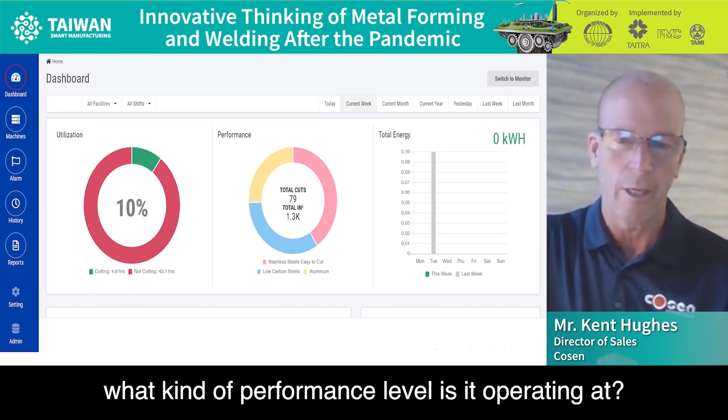First of all, Mechalogix was designed for utilization of the machine. Our concept is that we'd like to know and understand, as that bandsaw machine is operating in the facility, what kind of performance level is it operating at. That way we can learn and understand the efficiencies. Is it operating at 70%? How do we improve upon that? Or is it at 40%, and there's a lot of issues maybe as far as applications, or possibly it's operating at 90%, and we may need to look at new machinery investments.

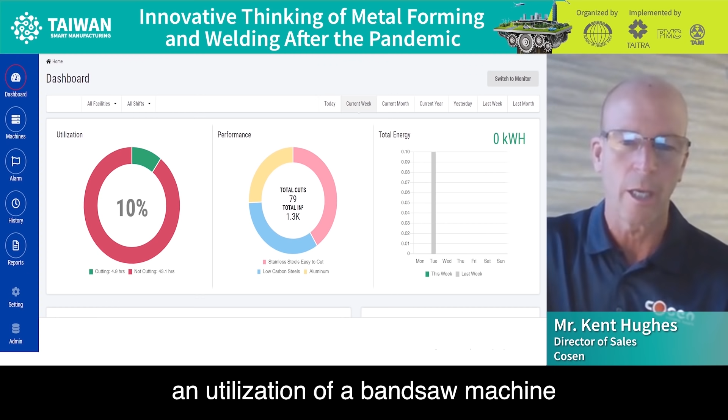That was the original concept of Cosen. Once we introduced it to the marketplace, it became much different. We've improved upon it, we've added many features to it, and mainly those features come back down to understanding directly what was going on with the bandsaw machine itself. Here you can see where we can show utilization of a bandsaw machine and actually how many pieces and how many square inches it has cut during this time frame.

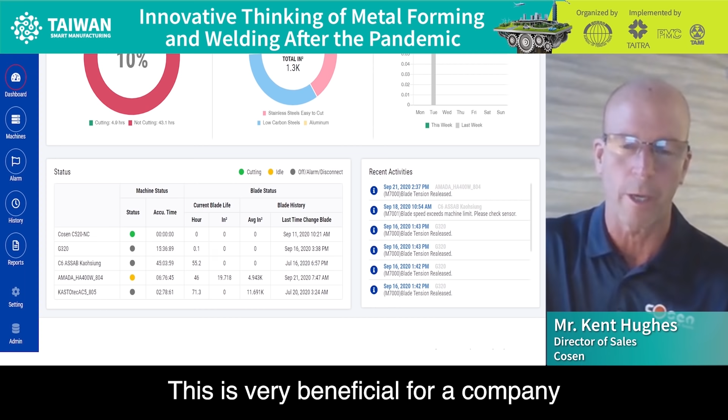You'll see on this next slide, if I am a customer that has multiple machines, maybe in one facility or multiple facilities throughout the country, I can now drill down and I can see all the bandsaw machines within my organization. I can see what the status is of each of these machines. So this is very beneficial for a company that has a larger operation, many more saws in their facilities.

Once I get to this next dashboard, this is a very important dashboard. Now I can look within each facility or each site category, and I can look at each specific machine, and I can see what is currently going on with that machine, whether it is up and running, what type of bandsaw blade is on there, what speeds that machine is running, what feed pressures, what is the cutting rate. So I have a lot of detailed information.

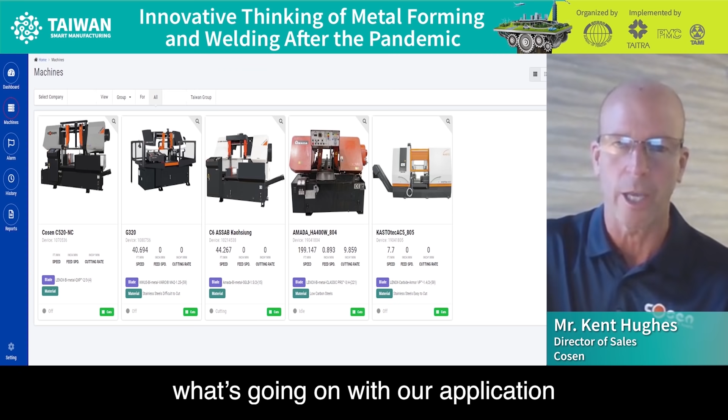And this is just a dashboard, but what I can do is click on each of these machines and drill down into more information, which will help me understand what is going on with our applications and how we are performing for each application and each saw.

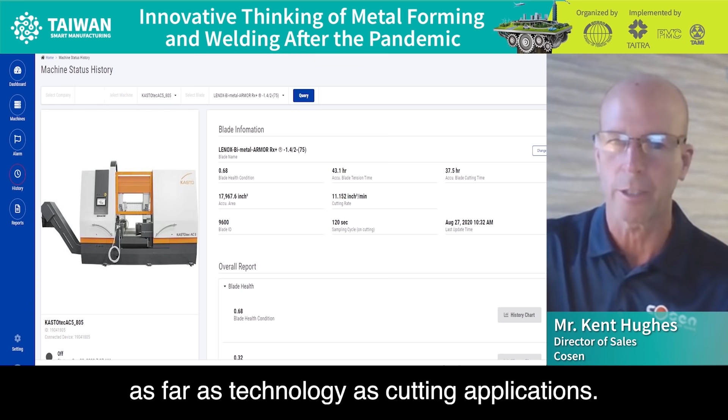From here, we can look at the blade information. Any bandsaw machine is great as far as its technology and its cutting capability applications, but the bandsaw blade is really truly the tool that's doing the work. A lot of people have a hard time understanding what kind of performance level they are getting off of each bandsaw blade. This really helps drive the information of each blade, what it's doing, what its total life has been, and what kind of cutting rates it's getting.

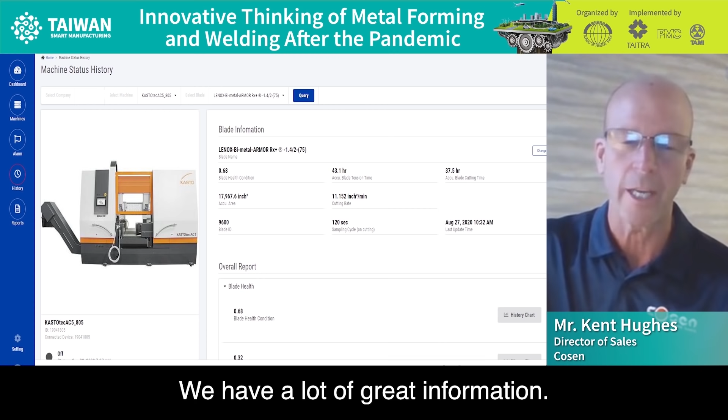So it really helps us to understand which bandsaw blade may be great for that machine or for that application that we're currently running. So we have a lot of great information. That is what has improved upon Mechalogix over the last couple of years, is more of the blade information.

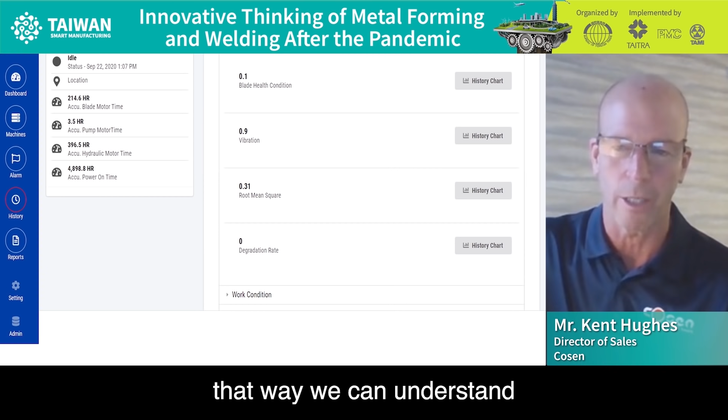On our next slide, you can see that we have windows here where we can drill down. We can look at specific blades, we can look at charts, we can put up alarms on blades to really understand. So it's not just the performance of one blade, but we can start to look and see a history. That way we can understand what each blade is doing, but also what all of our blades are doing throughout the course of the year so that we can understand our total selling costs.

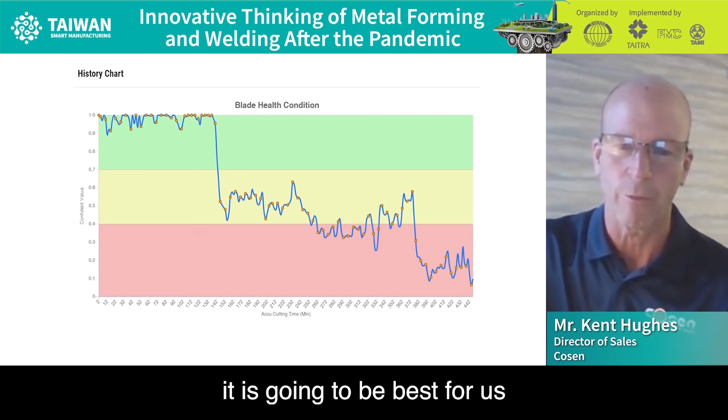And at that point in time, if we have an exotic material that's going to take a long time to cut, it is going to be best for us to make that decision to change that blade. So the data that we can pull on the performance of the blade is very, very beneficial for us for our future job cutting. And once again, so we're measuring the life of the machine, the performance of the machine, we're measuring the performance of the blade and the life of the blade.

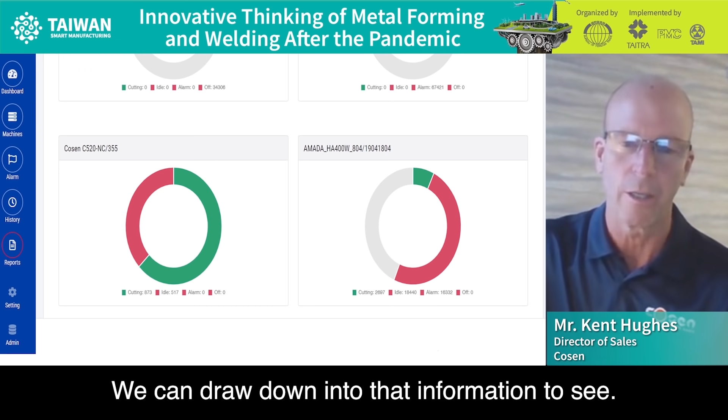Next aspect we get into is the total utilization of each machine. How much time is a machine cutting over a month, or over a quarter, or over a year? We can draw down into that information to see. And then also, what types of materials are we cutting? How many alarms are going off on those machines? What's the default on those alarms? So we can address those. And it helps us become more efficient, keeping our machines up and running, and also keeping peak performance of the blade.

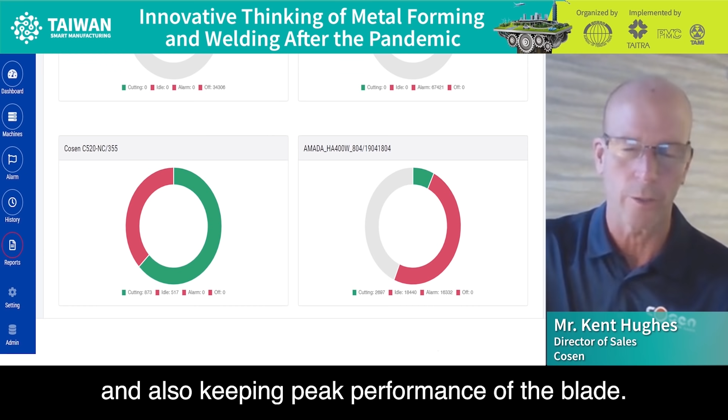Our next dashboard, we can go back into our library. So if we have jobs coming up that we have not cut in a period of time, we can go back and look at our library and we can see which blades worked on those jobs in the previous history. We can also see the performance of those blades. We can evaluate then which blades are going to be great blades for the future applications that we are going to be running. So there's a lot of great data in here.

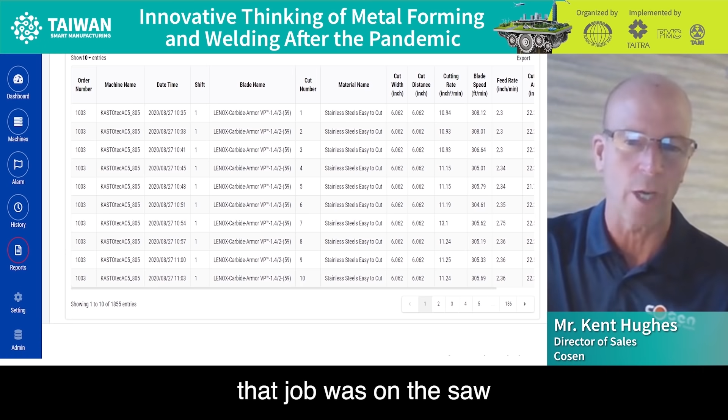And our final thing that we're starting to utilize is that we now have adjusted to where we can do costing on actual cutting jobs. So if you have multiple pieces that are going to be cut for a job, now we are starting to capture the reporting on that, so that we can see how much time actually that job was on the saw, how many cuts it made, how many blades it went through, how much time for the operator. And it really gives us a true performance of what our cutting applications are. So we're really excited about the new features that we're adding to Mechalogix from the original concept of being machine utilization.

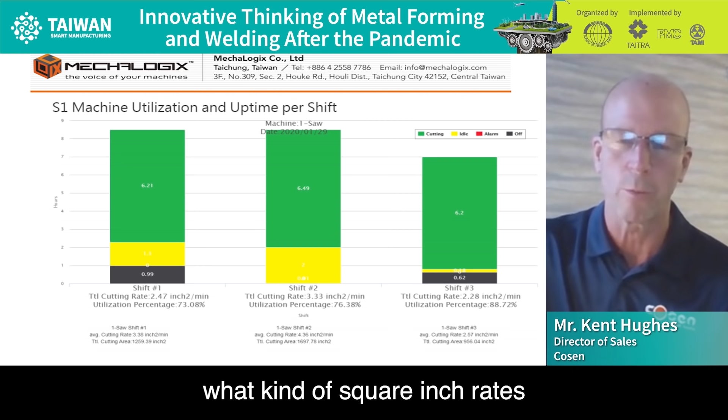Then what we can do from there is we can draw and manufacture reports. And we're really unlimited as far as our reports. You can see in this report that we're able to analyze the utilization and uptime per shift. So we can look at the different shifts to see what they were doing, how the performance was of that machine and the applications. We can look and see what was the uptime, what kind of square inch rate they were cutting on each machine. And it really helps us to understand where our bottlenecks may be, where our throughput is.

But this is great reporting that allows us to address issues on a real-time basis. So we can generate these reports, like I said, on a shift basis, on a daily basis, a weekly, a monthly, quarterly, whatever it may be. But it's a great technology for us.

We're really excited about Mechalogix as we start to introduce it to the marketplace and the opportunities it's going to provide for the end user to understand the bandsawing application and the costing that goes with that bandsawing. That is the one area that many end users don't have information on.

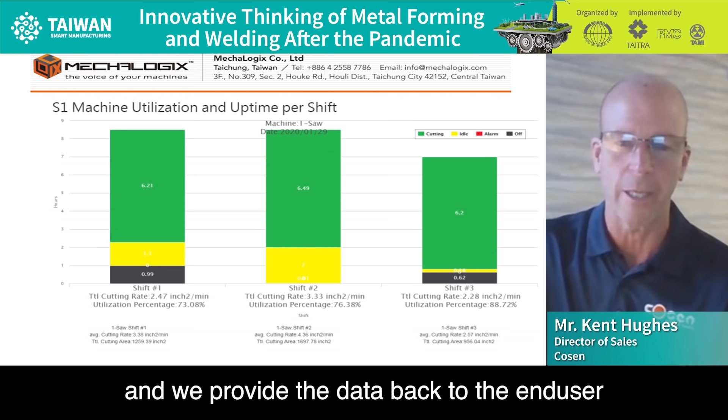Currently they have to utilize spreadsheets and hope the operator will fill in the information so they can capture this data. Mechalogix is a system we hook up to the bandsaw machine through many sensors, and these sensors continually monitor the performance of the machine. Because of those sensors, we don't rely on the human element to input this information. We capture it right there at the machine, in real time. That takes all the guesswork out of it, and we provide the data back to the end user so they can make decisions in their sawing applications.

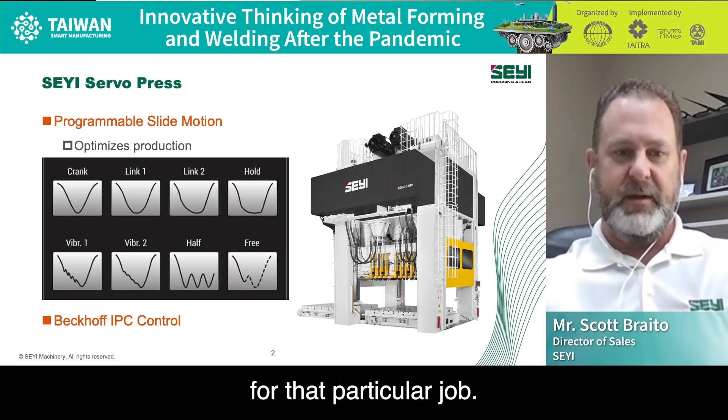Our presses come with a variety of pre-programmed slide motion profiles: crank motion, two different link motion profiles, a hold, two vibration motion profiles, a half motion profile, and a free motion profile, which allows the operator to basically build their entire own setup. These allow you to tailor the production of your press to the particular need for that job. We do this using our Beckhoff IPC-based press control.

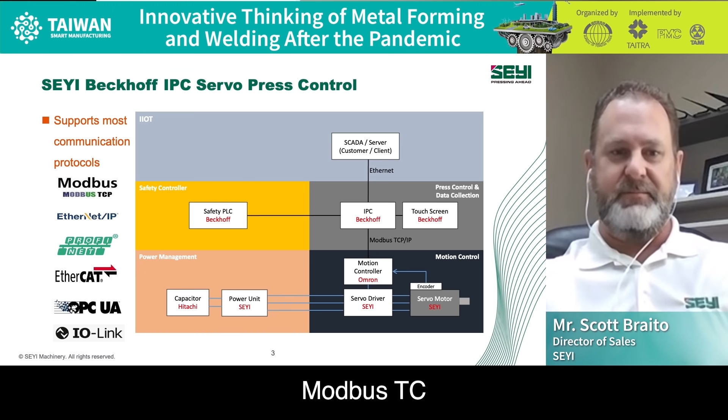The IPC-based press control is a very flexible, very powerful system that allows us to communicate with various different PLC systems, all the major ones around the world. The IPC Beckhoff control can then interface with the SCADA, the customer client, the customer service, using various protocols: Modbus, TCP, Ethernet IP, Profinet, etc.

This also allows us to easily integrate our intelligent manufacturing system. We're going to go through this a little bit, so you'll see basic information on the equipment, the reporting we can generate from the combined efficiencies, management reporting, as well as maintenance information.

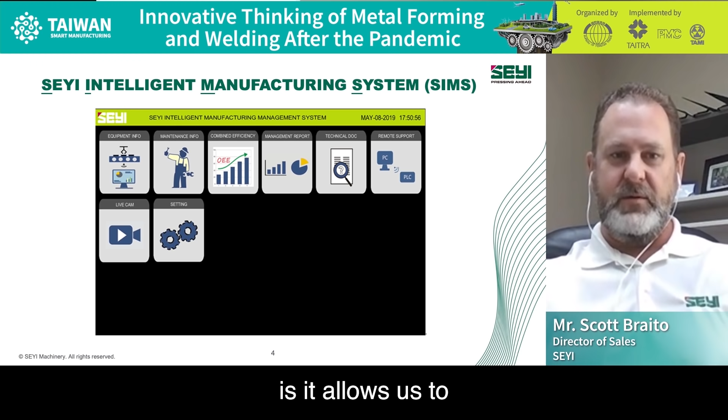What the intelligent manufacturing system does is allow us to interface with a lot of different additional items on the press. We add a lot more intelligent sensors to it to allow the operators, maintenance personnel, as well as management to gather, collect, and record equipment information and maintenance information.

The system and software will generate combined efficiency reporting. We can get maintenance status, and operators will enter an interface when the press is down for a reason. These reasons are compiled and generated into management efficiency reporting. Maintenance information for preventative and predictive maintenance allows you to be much more proactive in running the press, timing your maintenance, and improving your uptime.

The combined efficiencies take all the various features, run through the calculations, and generate your operation analysis, downtime analysis, everything you need to improve the operation of your equipment.

Our software has the ability to automatically disseminate these management reports to whoever you designate. They can generate and output them on an interval basis, whether hourly, daily, weekly, whatever management decides they want to see and how they want to see it.

We're also able to use the system to send messages immediately in case of an unexpected error, or timing to maintenance or service personnel, and also program it to provide those messages if you're getting close to a scheduled maintenance period.

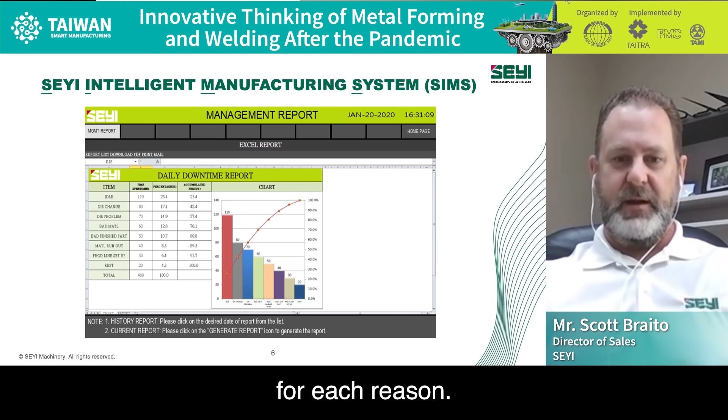Primary typical reasons are idle time or die change. As long as the operator puts in the proper code, it will generate the amount of time down for each reason, and then automatically prepare this chart and email it to whoever you designate for this operation. It's a very powerful system that gives management a lot more insight into operating the equipment properly and how to be most efficient with your production.

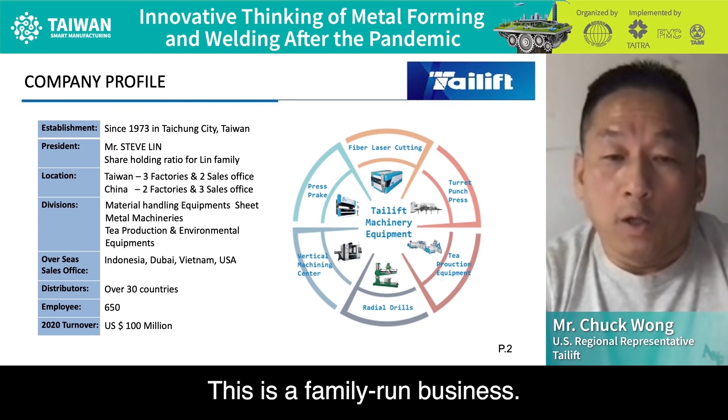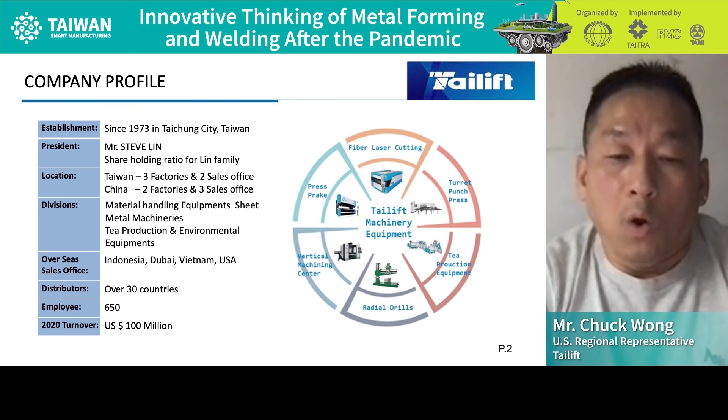This is a family-run business. Currently we have 3 factories and 2 sales offices in Taiwan, 2 factories and 3 sales offices in China. We are a material handling equipment, tea production, and environmental equipment fabricator. We have sales offices in Indonesia, Dubai, Vietnam, and US. We have distributors over 30 different countries, and a total of 650 employees.

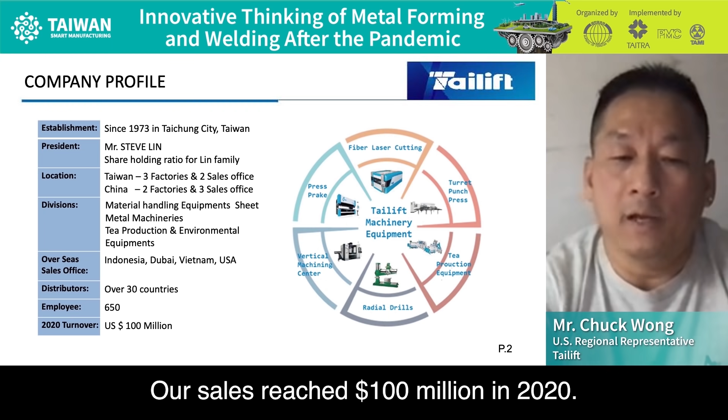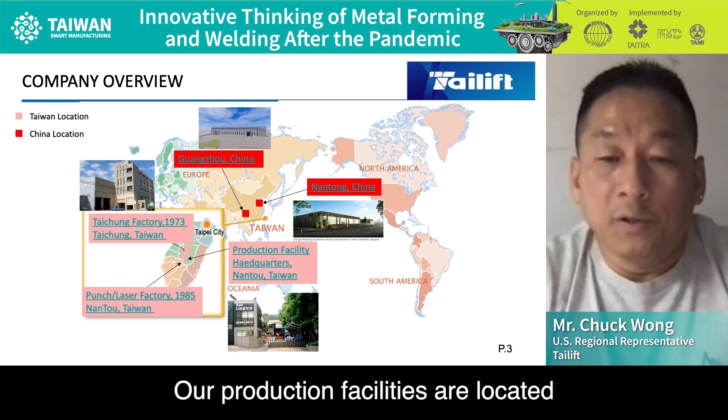Our sales reached $100 million in 2020. We started the Taichung factory in 1973. In 1985, we started another factory with punch laser in Nantou, Taiwan. We also have factories in Guangzhou, China and Nantong, China. Our production facilities are located at our headquarters in Nantou, Taiwan. We have a global branch of sales office contacts so you can reach us throughout the world.

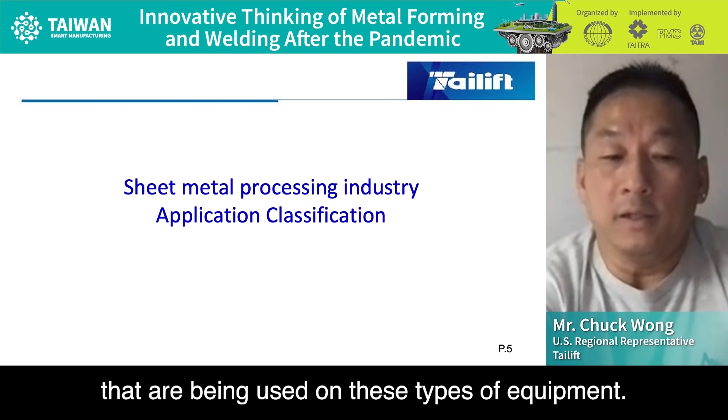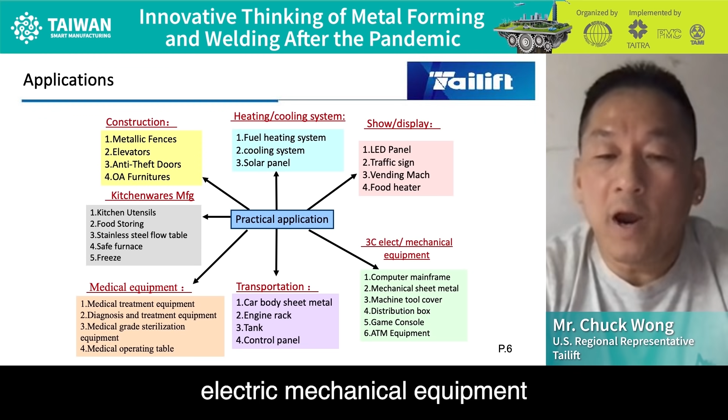We are a sheet metal processing industry, and I would like to talk a little bit more about the application of these type of equipment. For instance, they are used for construction, heating and cooling systems, show display, electric and mechanical equipment, transportation, kitchenware, and medical. These are only a few examples of what we process with our equipment.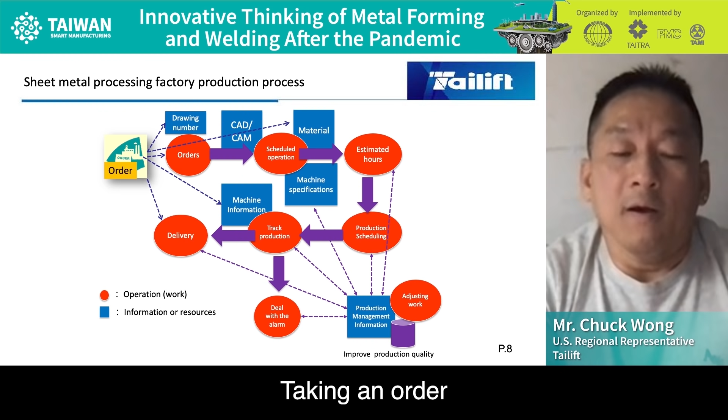Sheet metal process equipment automation process. Here I would like to show you the sheet metal processing in automation, shown in the red and blue colors of the flowchart. The blue shows the process through the office - taking an order, entering an order, processing through the internal system of the company. The red shows it going out to the factory - taking an order, distributed to different departments for processing until the product is done to ship out to the customer.

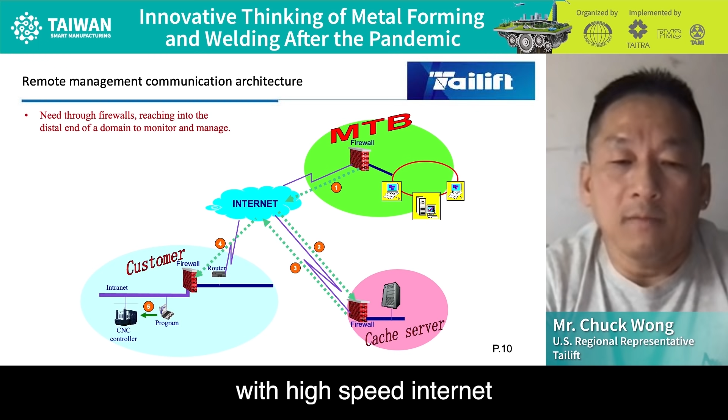This next page shows order management, delivery management, drawing management and planning, equipment, computers, software like ERP, CAD/CAM systems to process the manufacturing requirements to get the products done for the customer. With that said, you have to have a good internet system with firewall protection, with high speed internet to protect the data, and to be able to remotely communicate throughout your whole company process.

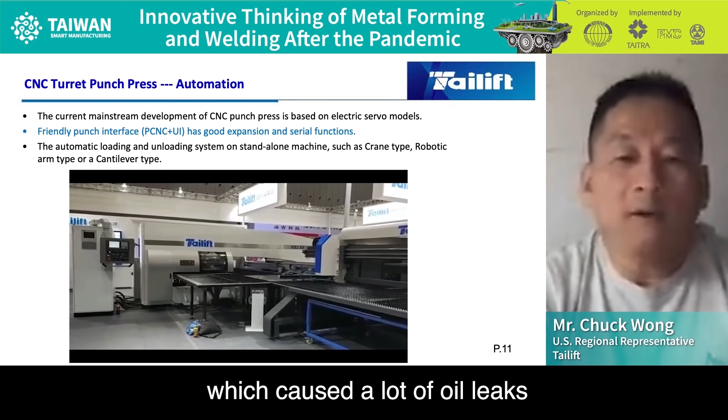Here I would like to show you the latest and greatest punch press that we have. This is what we call the latest servo electric model. Unlike the old hydraulic model, which caused a lot of oil leaks and expensive fixes, the servo electric model doesn't require a lot of maintenance. This is a video that shows it - it comes with a load and unload system.

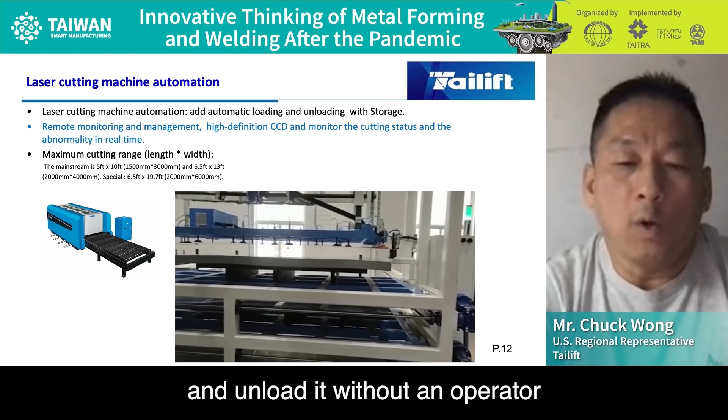Here I have a video showing the laser cutting machine automation. This is the latest model, showing the automation along with the storage shelf. You can customize whether 6, 8, 10, or 12 shelves depending on your facility's needs. It shows how you can load all this material into the machine and unload it without an operator, saving a lot of processing time.

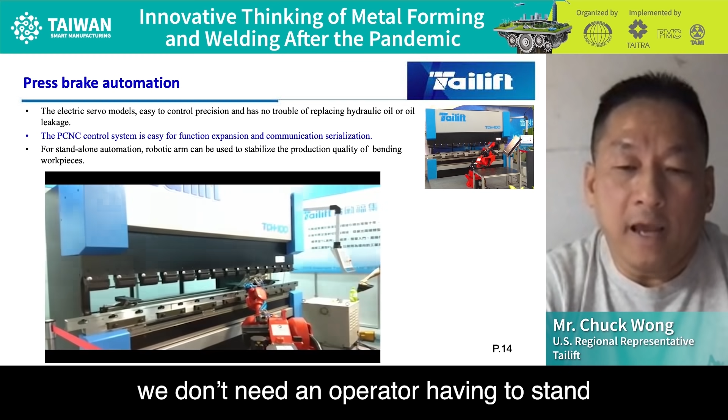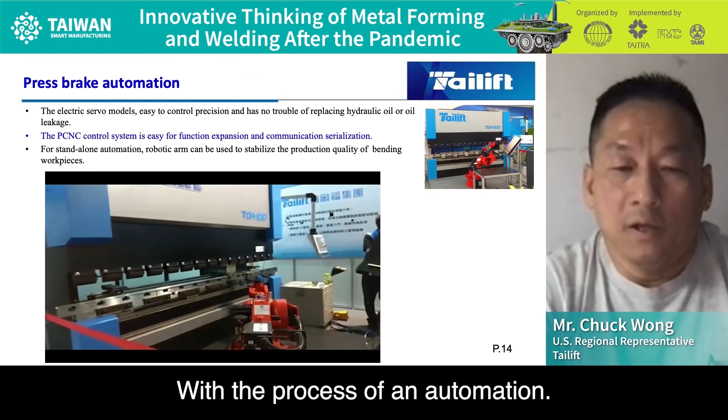Here are the pictures with the storage rack that we showed. This video shows the press brake with a robotic arm. With the robotic arm, we don't need an operator to stand and set up the toolings and get everything done. With robotics, we can have automatic tool loading, automatic bending, and automatic tool unloading in the automation process. Besides that, this is another servo electric press brake that, unlike the older version which used a hydraulic oil, is all electric, eliminating a lot of the maintenance costs.

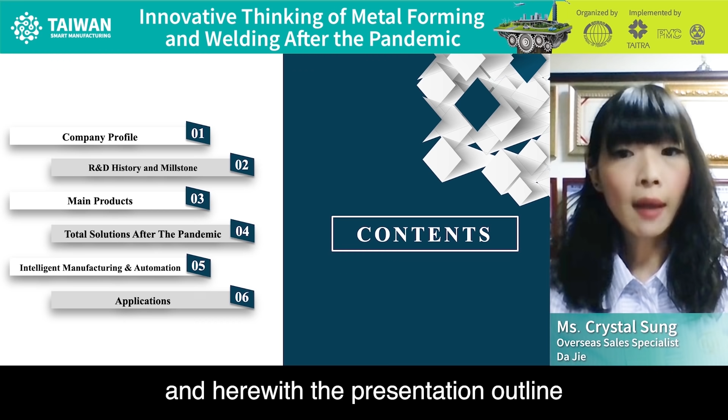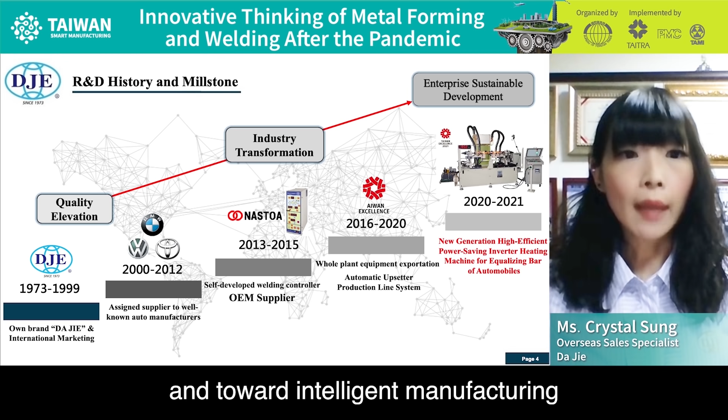The second part is R&D history and millstone. We concentrated on industry transformation toward intelligent manufacturing and automated production lines for customers in recent years. About our main products, our product quality has obtained the Taiwan Excellence Award consecutively for 6 years, from 2016 to 2021.

Regarding the total solutions after the pandemic, in order to solve some problems in customer production process, Da Jie uses intelligent control system as core technology to provide clients 45% power saving and excellent welding quality. We have already successfully entered many international well-known auto suppliers' markets.

The next part is about our intelligent manufacturing and automation. Da Jie high-efficient power-saving intelligent upsetter machines include 3 features. The first is an innovative R&D 3-phase balance control system, enhancing production capacity by about 4 times.

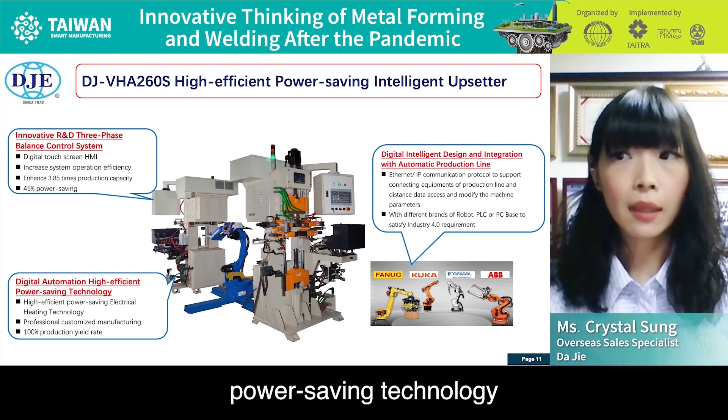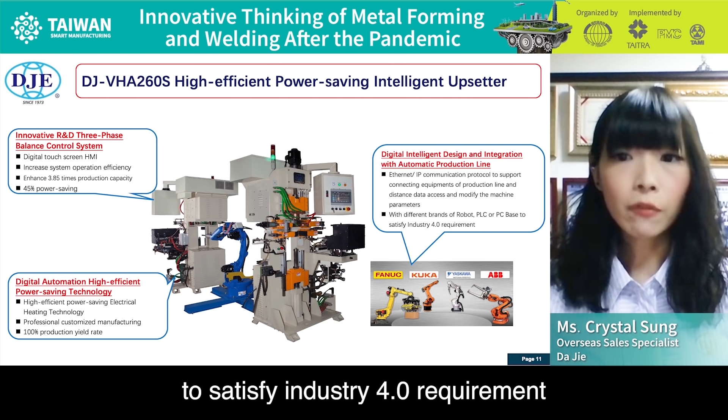The second is digital automation high-efficient power-saving technology, excellent quality heating upsetting technology, and 100% production yield rate. The third is digital intelligent design and integration with automated production lines that could connect with different robot brands to satisfy Industry 4.0 requirements. There is a comparison table for our intelligent upsetter and traditional type for your reference.

The three-phase power balance network of the intelligent upsetter avoids affecting the work of other precise machinery, and one-piece forming saves 50% more material than the traditional type.

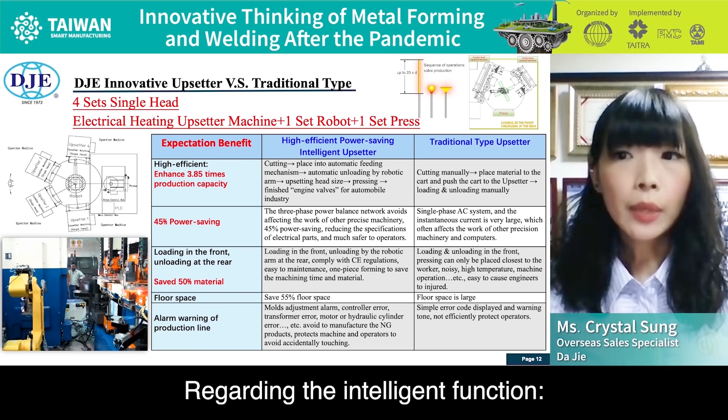Regarding the intelligent function, the first is through numerical control to achieve unmanned manufacturing process management, which includes many operating information items and has built-in more than 100 sets of parameters for customers to set up.

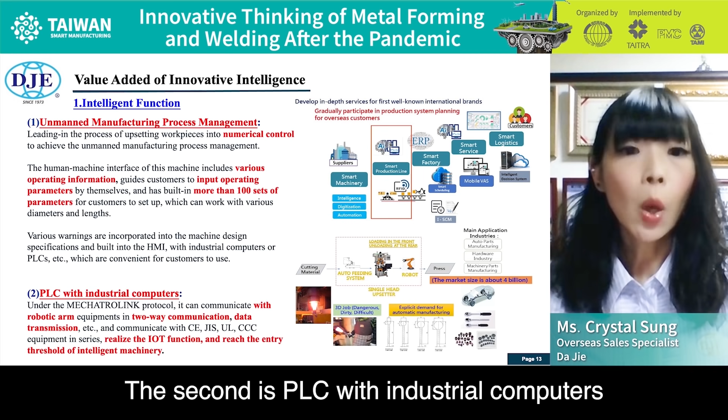The second is PLC with industrial computers, enabling two-way communication with robots, data transmission, and realizing the IoT function to reach the entry threshold of intelligent machinery.

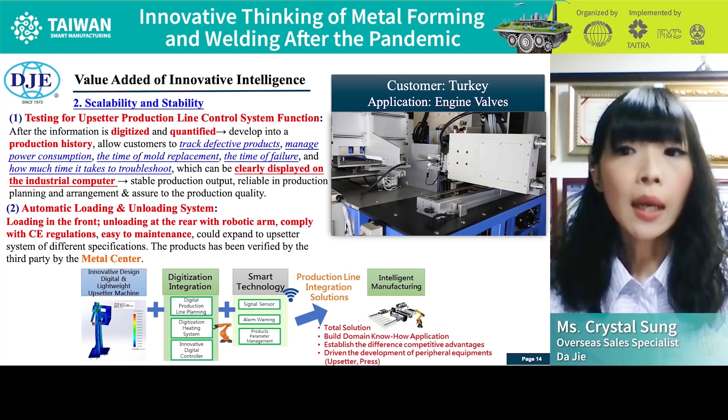About scalability and stability, we test the upsetter production line control system function and develop it into a production history, allowing customers to track defective products, manage power consumption, and so on, to assure product quality. Moreover, automatic loading in the front and unloading with robots at the rear comply with CE regulations.

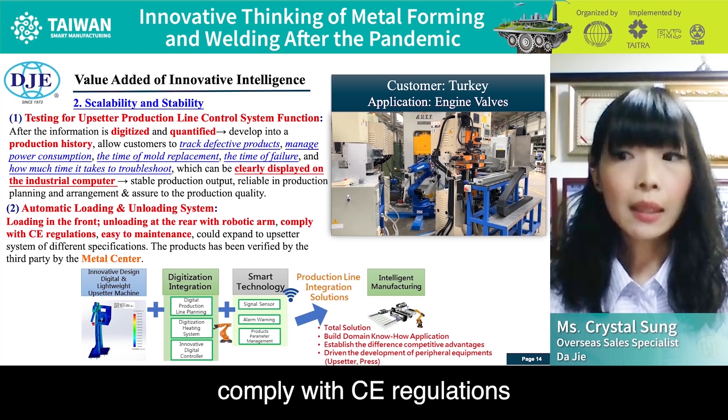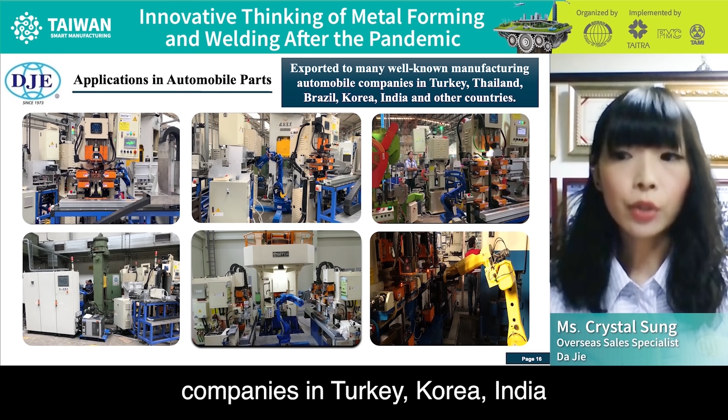About applications in automobile parts, Da Jie products are not only for Taiwan's auto industries. We also have many successful projects for well-known automotive manufacturing companies in Turkey, Korea, India, and other countries. Da Jie's specialized manufacturing machines are applied for engine valves, truck rear shafts, fuel tanks, chassis, and other bar-related auto parts.

Then I would like to share our products video with you.

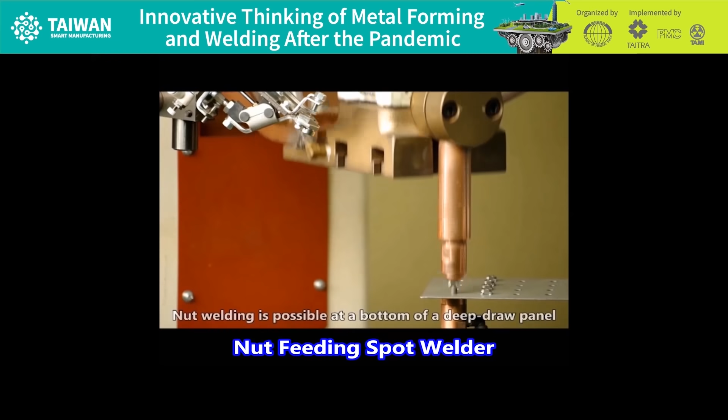If you are interested in our products or have any questions about our machines, please kindly feel free to contact us. That brings me to the end of my presentation. Thanks for your attention.

The automotive and home appliance industries are the two major industries where our machines are mainly applied, especially the automotive industry, which has become one of the most important industries in the world. For this reason, the automotive field is a potential market where we have focused for decades.

This hydraulic company was established in 1976. Our head office is located in New Taipei City, Taiwan, and more than 90% of our presses are exported to other countries in the world.

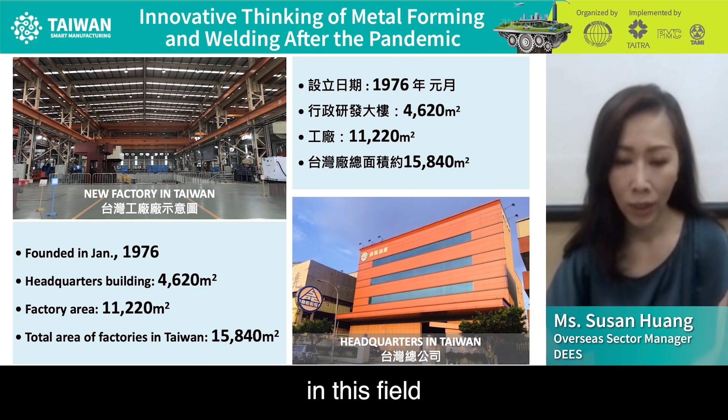The establisher, Mr. Huang, has 60 years of experience in this field. Also, the company has won many industry awards over the past years.

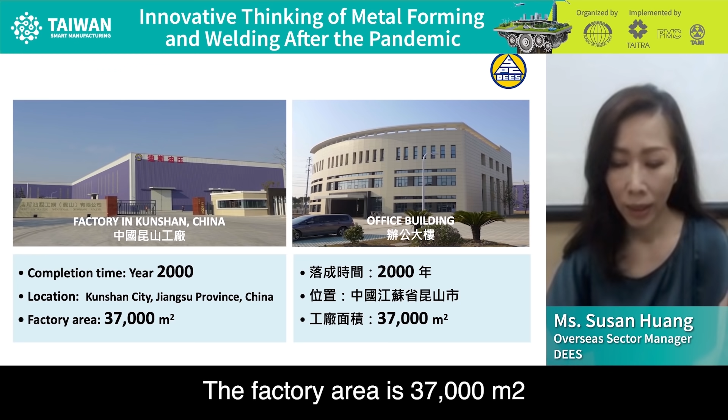The company has built a facility in Kunshan City, Jiangsu Province, China, since the year 2000. The factory area is 37,000 square meters, and this factory mainly supplies local markets in China.

As mentioned at the beginning, our presses are mainly applied in the automotive industries and the home appliance industry, and the rest includes electronics, aerospace, or other industry. All our machines are custom-made for specific requirements from our customers.

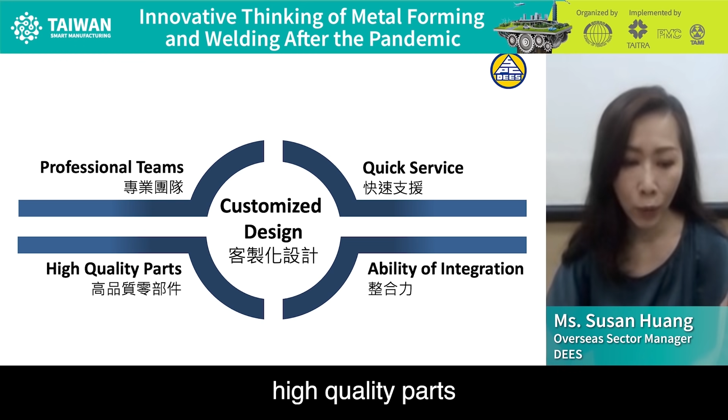Based on it, we have 4 superiorities: professional teams, high-quality parts, quick service, and the ability of integration. We have our own professional hydraulic and electrical engineering teams to design and customize every press for our customers.

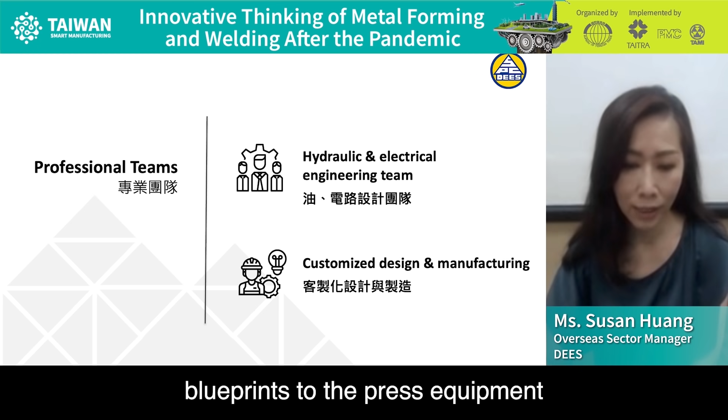We are able to plan the whole arrangement of designing the equipment from the fundamental blueprints to the press equipment or turnkey projects. We can monitor the PLC remotely for troubleshooting or programming online. This always provides quick response in 24 hours.

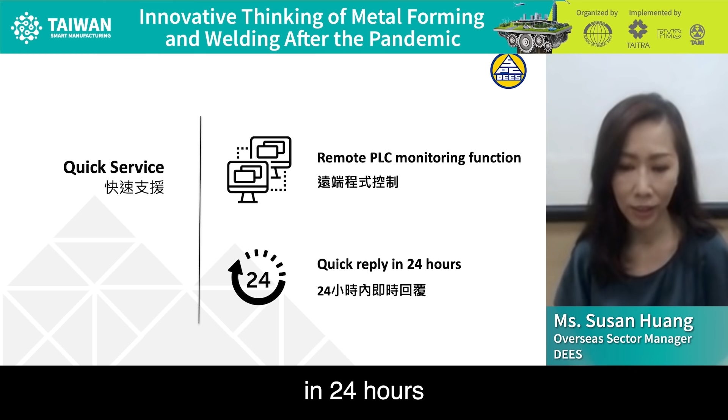We choose worldwide well-known and reliable suppliers for our major parts to guarantee the quality and also allows our customers to find replacements locally and easily.

We can also help our customers to integrate Industry 4.0, such as tooling dies, quick die change systems, transferring robotic arms, and automation systems.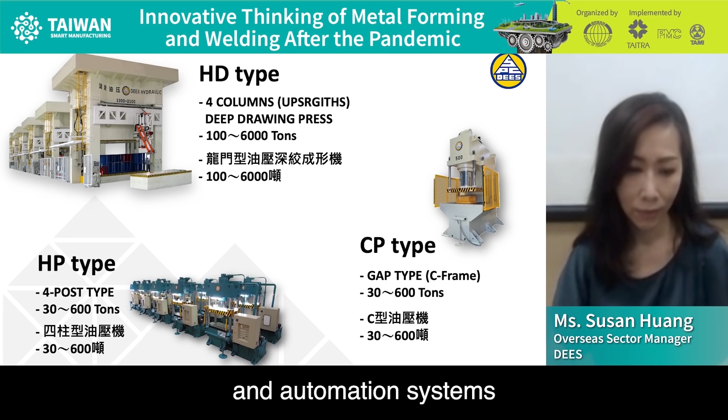Our hydraulic presses include 3 different types: 4 columns, 4 posts, and gap types. With the technology and the cordial attitude we possess, we are confident in being your reliable and trustworthy supplier.

If you are looking for hydraulic presses, feel free to contact us for more information, and we'll be very glad to talk more with you. Thanks for your attention. I would like to finish up my presentation by showing you a product video.

Many thanks to all of our presenters for updating us on their company's innovations in metal forming and welding. That was a lot of great information. Now we'd like to take a few minutes to answer any questions you put in the chat during the presentations, or that you can enter now. Let's see what we have.

Our first question is for Mr. Kent Hughes from Cosen. Kent, your Mechalogix application for your bandsaw machinery has been around since 2015. It started with the ability to monitor the performance of a blade and accurately forecast the number of remaining cutting hours left before a saw blade dulls and is no longer cutting with precision, or a complete breakage. How is this improving productivity and profitability for your customers?

Thank you for the question, it's a great one. With Mechalogix, when you have a customer that's cutting a very large cross section or expensive material, the last thing they want to do is make a bad cut. So with Mechalogix, we're able to start gathering history of the past performance of all the bandsaw blades, and we can start to do a predictive analysis of when that blade may fail.

This allows an operator to make the decision before starting a cut that could take hours, or with expensive material, to decide whether to change the bandsaw blade now so they don't have that problem down the road. This saves the material, it saves time and expense, so it's really beneficial in those two types of applications. We see customers finding tool life to be more and more critical in making that decision at the beginning stage of the process.